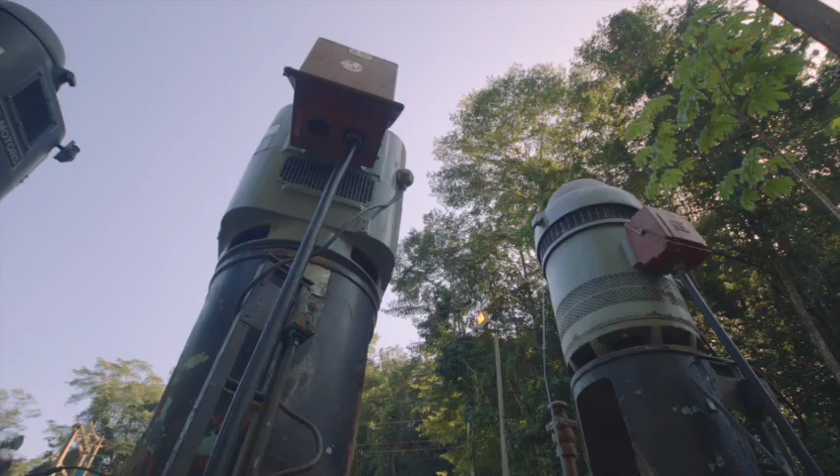Understanding the global importance of fresh water and its limited supply in today's world, where climate change is a real phenomenon, non-revenue water management is the first step the authority is taking to optimize the water being produced by the North Oropouche Water Treatment Plant as it attempts to meet the existing and growing demand for its customers.

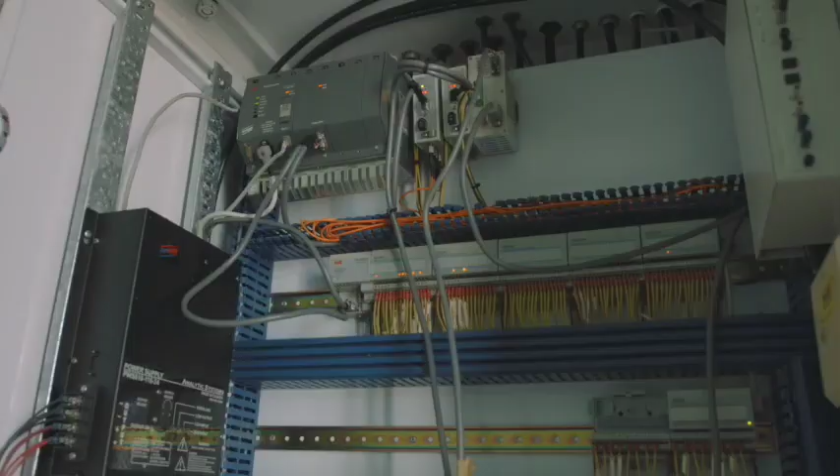To this end, the first smart water network in Trinidad and Tobago is being established on the North Oropouche Water Supply Zone by a team of dedicated persons from the Water and Sewerage Authority. The team aims to automate and digitize the production and distribution of this system.

North Oropouche, which is our second largest water production facility, though producing that volume of water, the water was not actually reaching the areas on its extremities. So for example, Five Rivers, Coal Mines, Coryal, Manzanilla. So in our attempt to better serve the population, we put together a small team of engineers and other special purpose practitioners to develop and assess the network towards producing a better supply to the community.

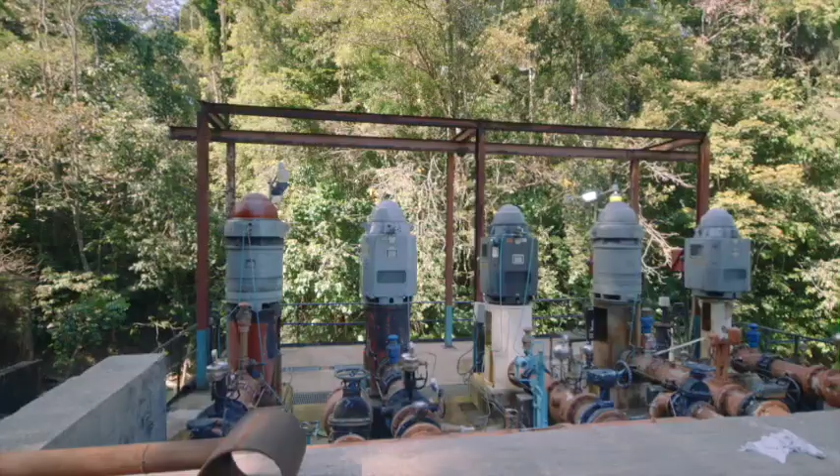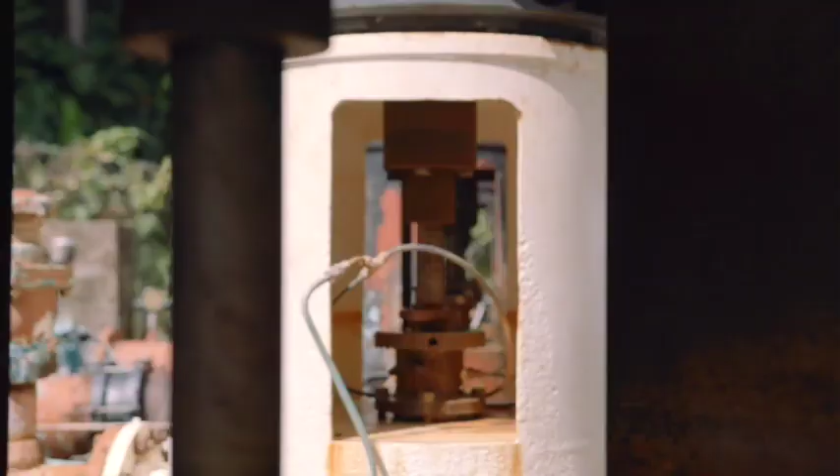The North Oropouche plant was built and commissioned in the early 1980s, and at present the current capacity at the plant is 20 million gallons per day. There are limitations on the production at the facility which varies in extreme dry conditions as well as when there's extreme rainy weather conditions. The potable water being produced by the North Oropouche Water Treatment Facility would exit the facility or be discharged by the facility via a 42-inch pipeline.

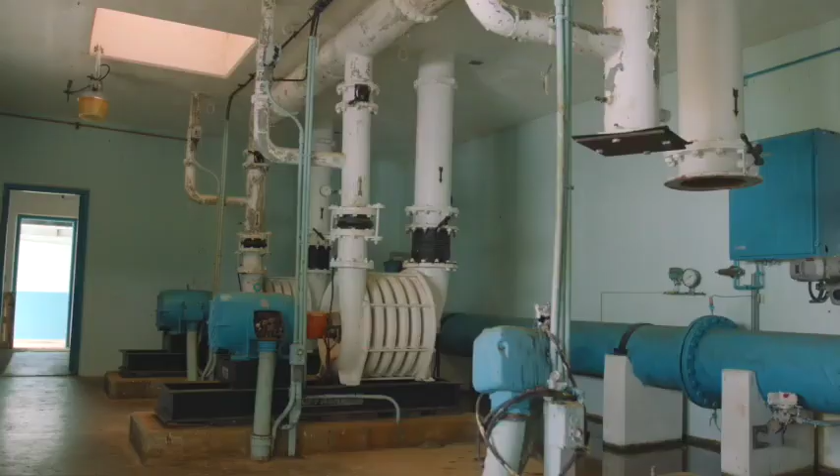This pipeline has approximately 13 or 14 offtakes, and there's no actual management of this water through the offtakes. So basically we have a first come, first serve. The offtakes closest to the plant would receive the highest pressures, the highest volumes, despite their actual need. We noted that proper management of the potable water along the distribution network had to be implemented.

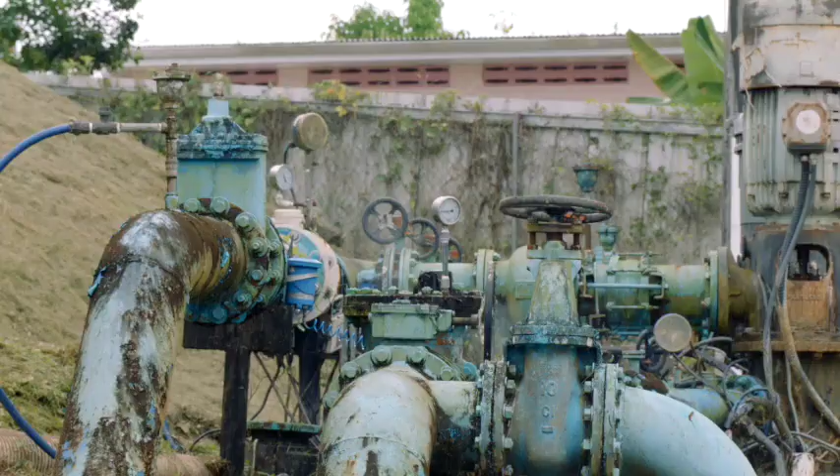After this upgrade, the plant will be continuing to produce 20 million gallons, but instead using 4 water pumps. We will now have that extra space, one pump, to become a standby so that in the event we have failure, we can easily switch over.

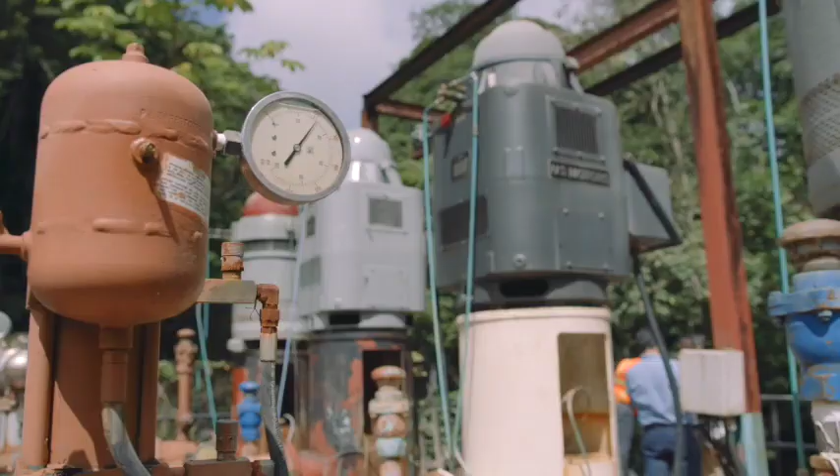So what has been done differently with the North Oropouche Supply Zone is an end-to-end approach in terms of the automation. No longer are we just looking at automating individual facilities and boosters. We're also looking at automating the valves of the offtakes, which allow now pressure management to be done from the input at an offtake throughout the critical points located at what one would call the worst case hydraulic nodes within the distribution system. Nodes that actually allow the authority to estimate how well customers are being serviced within that particular distribution or pressure management zone.

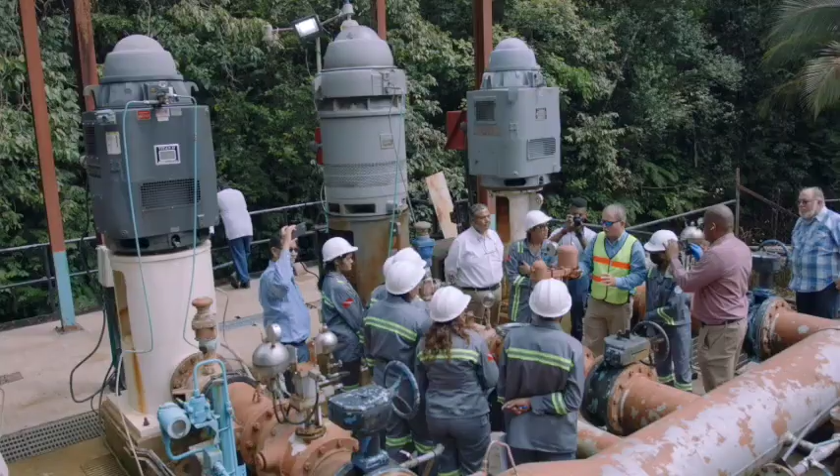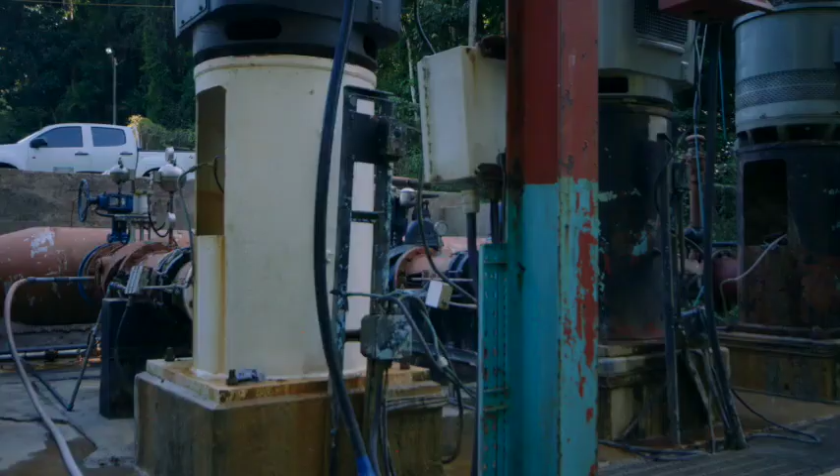The assessment started with gathering data because we intended to solve the issues from a very data-driven standpoint. So we gathered data from an infrastructural standpoint, that is the civil, mechanical, electrical components as well as the automation component. So we would have assessed the efficiency of all of the pumps on the plant itself as well as the associated booster stations, the electrical as well as the mechanical. We also looked at the civil aspect of the raw water intake and the plant itself for their level of efficiency.

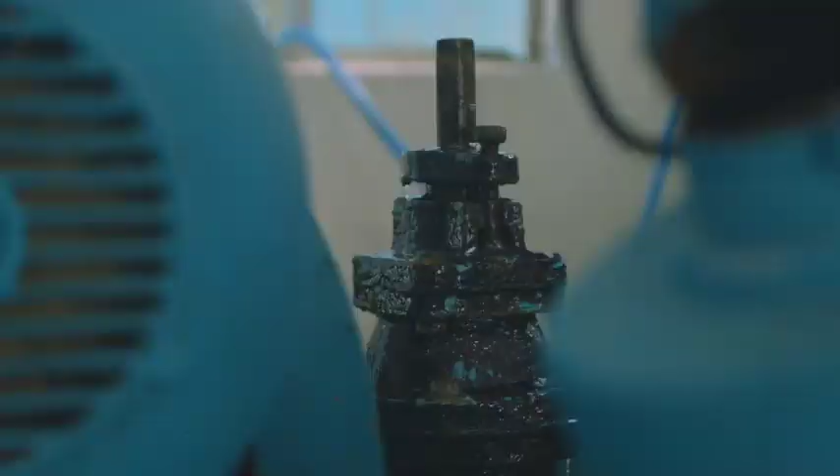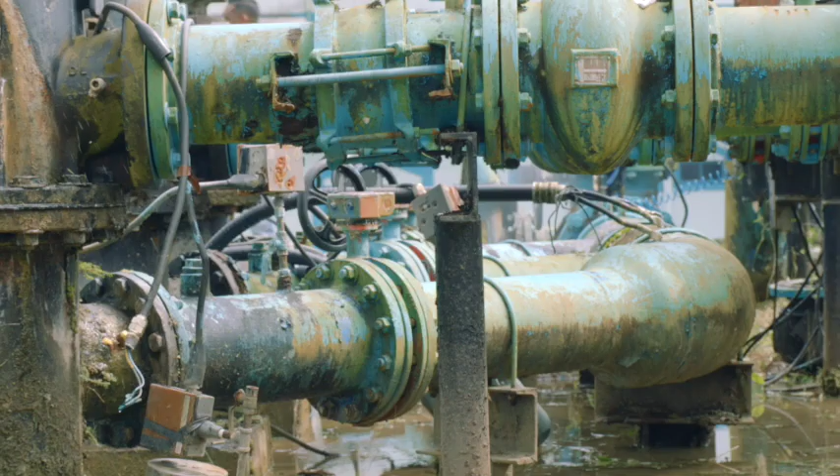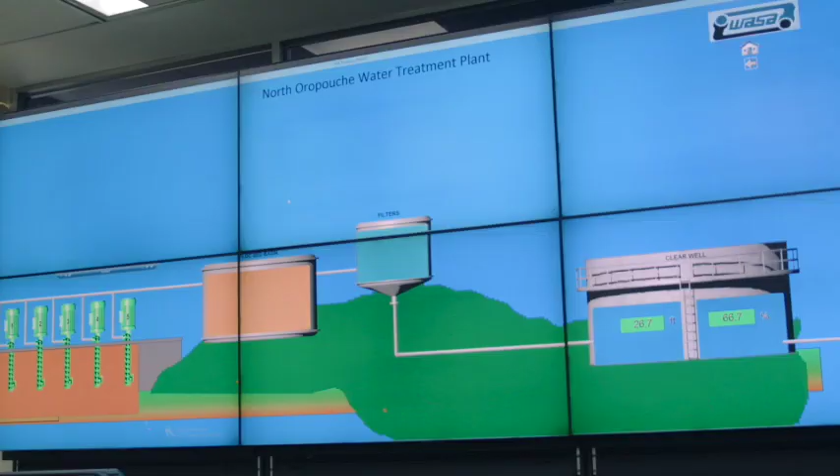The concept of creating a smart water network is to improve the ultimate service to customers, improve their service and reliability. And this will be done through the installation and implementation of not only flow meters but also pressure loggers on each of the offtakes. We intend to also install smart PRVs which regulate both the pressure and the volume of water as needed through each of the offtakes. Automation, therefore, is the foundation on which a smart water network is built. It's not the only component, but it is the foundational requirement to have a smart water network.

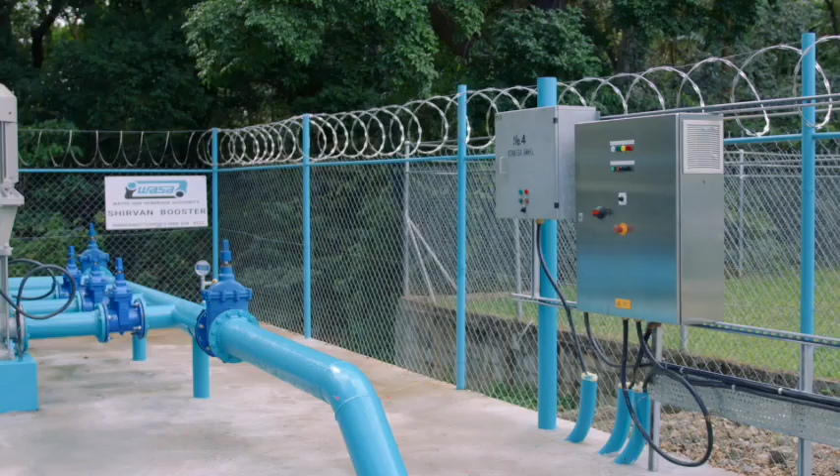So typically SCADA would look at facilities, but as we talk smart water network, and the operative word being network, it speaks to a wider penetration, the creation of a digital nervous system throughout our network. And mass distributional sensors will play an integral role in establishing this, and the first would have been the data logger. So the data logger basically is a simple device that measures either pressure or flow. It could do other parameters, but that typically is the 2 parameters that we use it to measure. And it will measure this in real time and transmit it telemetrically back to our central data store.

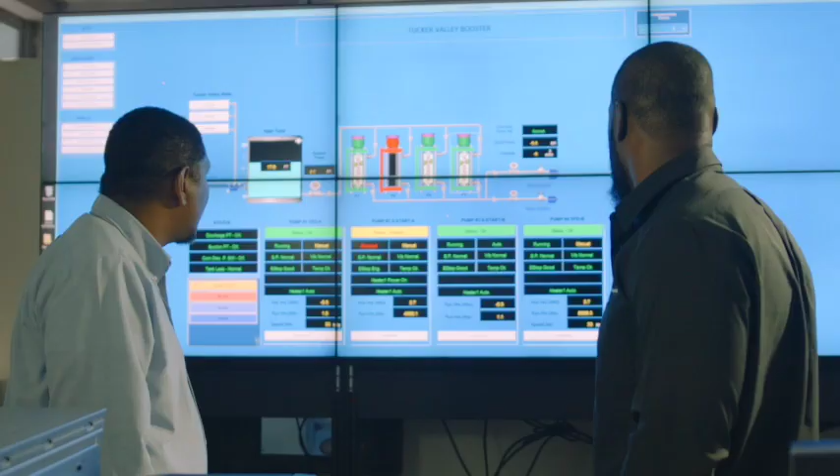The control system therefore has access to that information, and based on how it is programmed or algorithms that exist in terms of best practice for service deliveries, decisions can now be made on what sort of pressures are required to give customers a better supply.

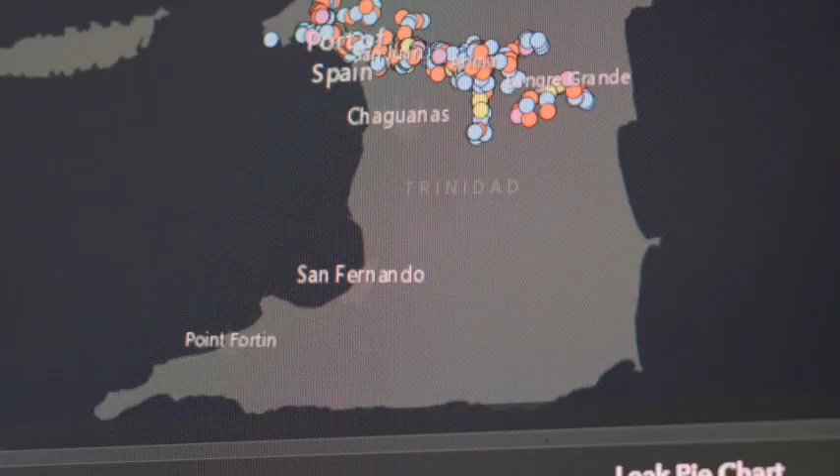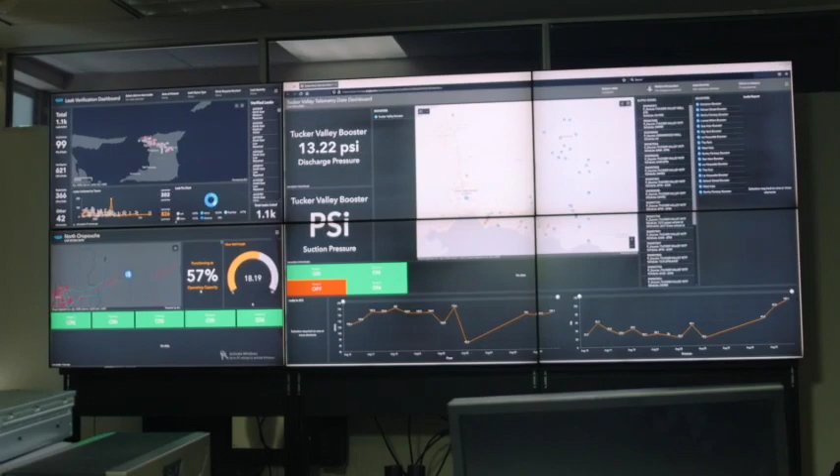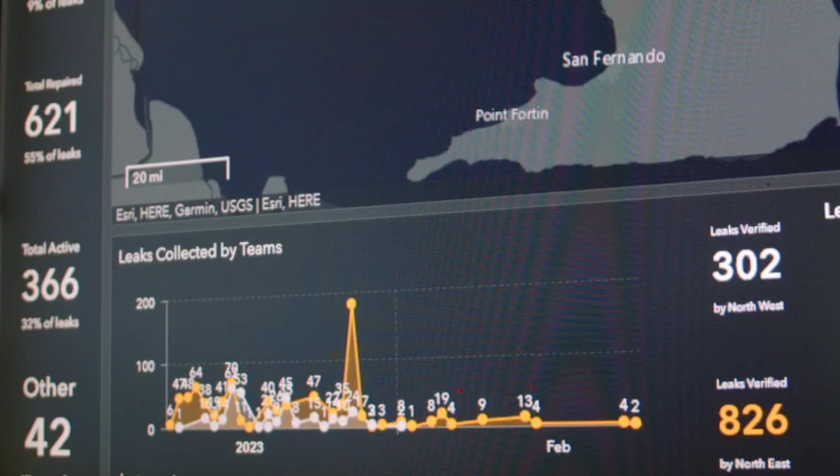The gathering and capturing of telemetry data across the country is just half the process of actually utilizing the data. The other half would be displaying and visualizing the network across geographic planes. The multiple ways in which data is going to be presented will be done using the ArcGIS environment across the authority. Dashboards will be generated to allow managers and decision makers real-time information so that they can make more educated and informed decisions. With the data being captured, we'll be actually able to draw a real picture as to what is going on at the plants.

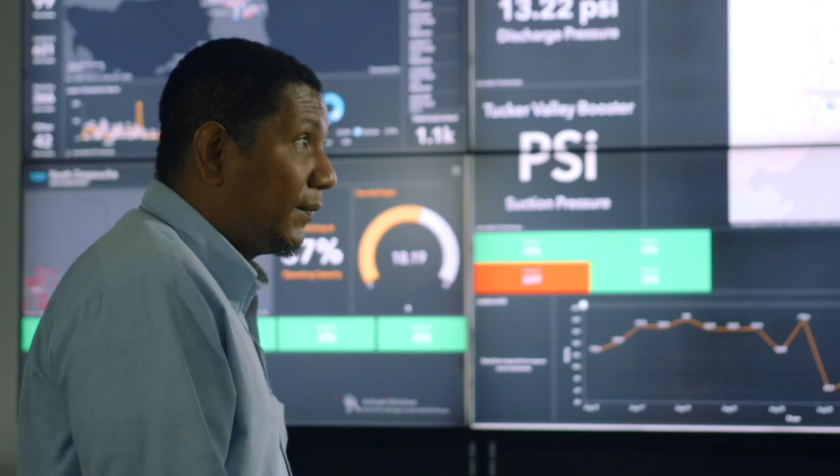With this data, we'll be able to see where pressures drop off or flows increase, which will allow us to alert managers in regards to issues that need to be addressed. That data would allow better decisions to be made as to what is required to actually transition customers to a 24/7 supply.

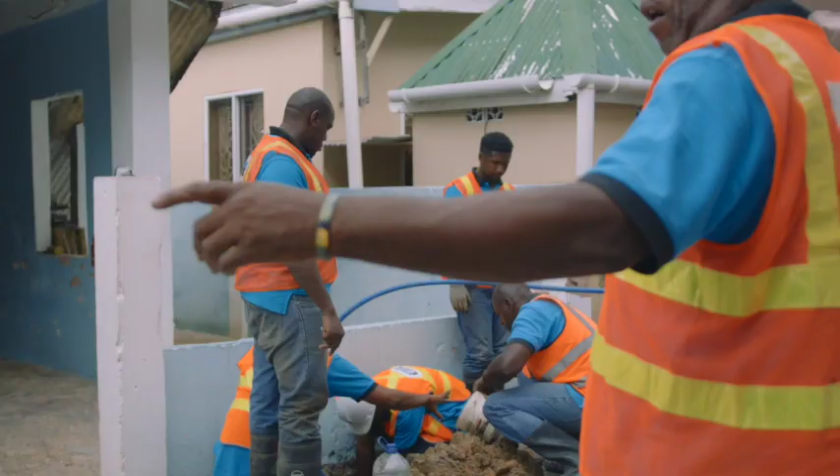With the establishment of our Operation Control Center, we'll have 24-hour monitoring taking place. With this real-time data, we'll actually be able to perform the duties of responding to customer issues regarding no water, low pressures, faster at a real-time pace. Visually understanding what is going on at our facilities, being able to quickly identify leaks, quickly identify anomalies on our system and address them on a 24-hour basis.

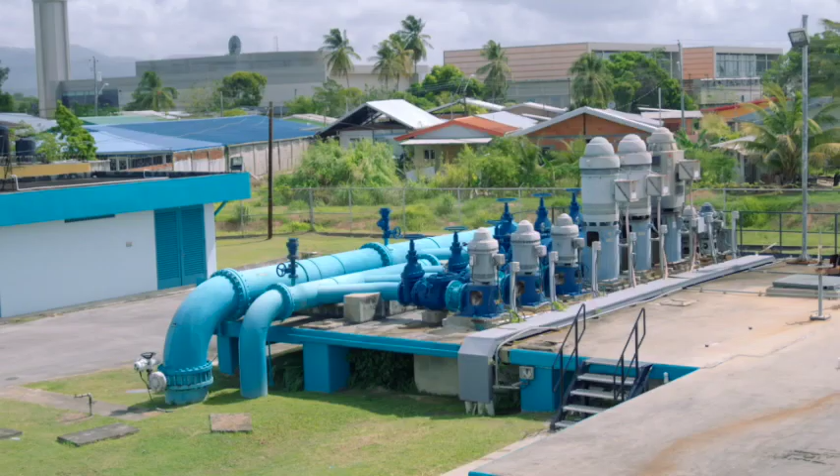So together with the increase in the infrastructural work or the refurbishment of the various plants and facilities, we also intend to increase the level of automation both at the plant as well as along the distribution, transmission, trunk main. We would move therefore from the source of our product, which would be the water treatment plants. We'll look at the transmission and distribution systems, and of course the facilities along the way such as boosters and wells, and we'll also look at valves and how we route water to customers.

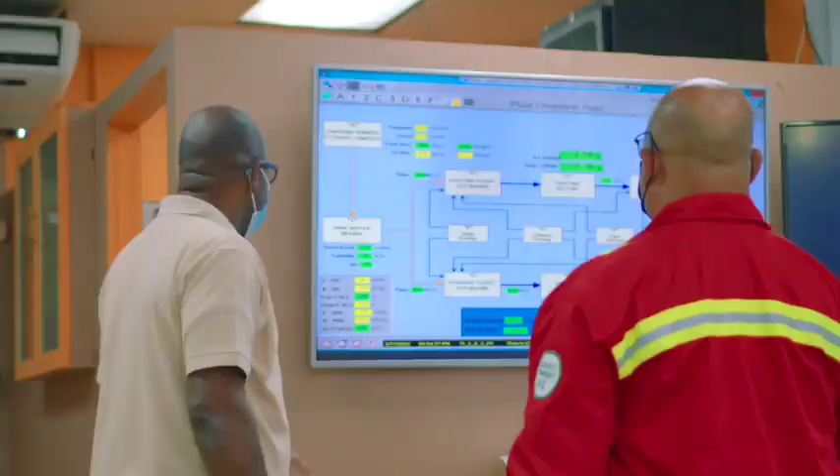That allows us to do pressure management. And pressure management and the control and delivery of not just water, but the service factor, which has to do with the pressures that they deliver at and the schedules being met. That ability to optimize that delivery with those parameters is what comprises a smart water network.

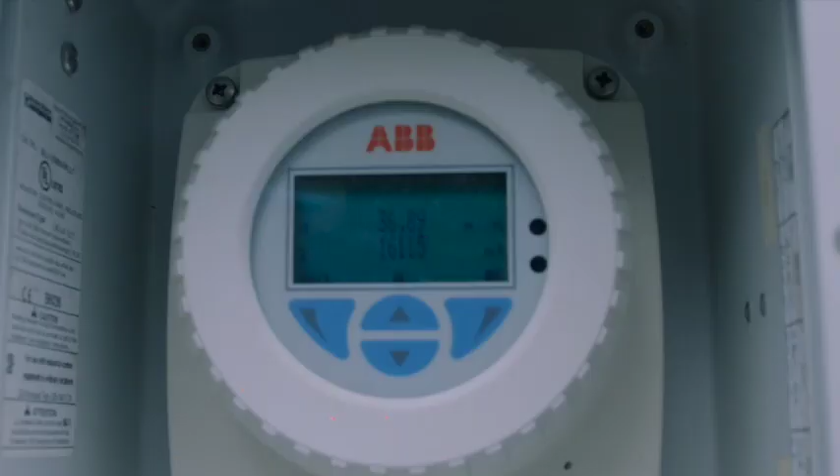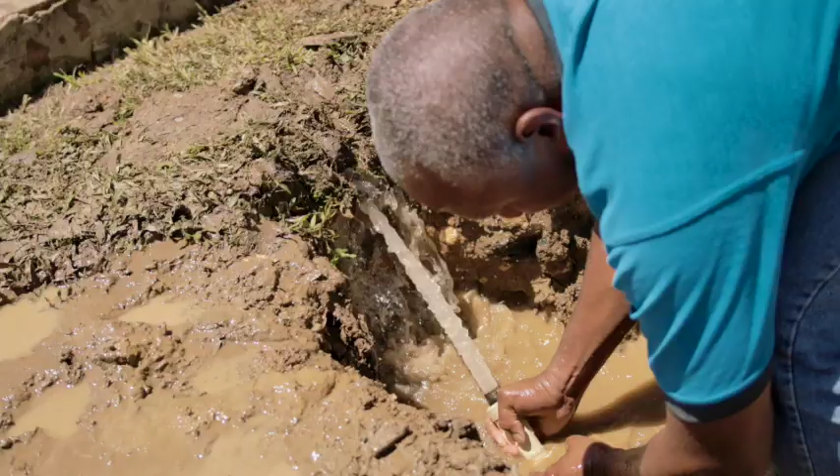With the capture of data, we will not only have data for one specific plant, but nationwide, both Trinidad and Tobago, allowing us to constantly monitor in real time all our plants and all our facilities. We'll be able to actually accomplish real-time job management of our employees. So, for example, reports in regards to leaks, in regards to no service, all these things will be actually populated on our dashboard immediately from our employees, so we know areas that we have to investigate.

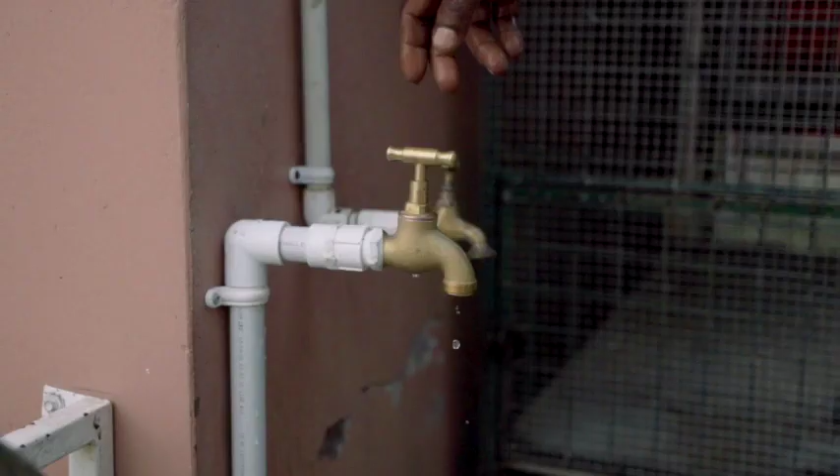Just the ability to be able to have pressure management being performed. The first benefit would be that the available water would now be directed to those who need it most. And we will no longer have the case of high pressures going to areas that don't need it and other areas along the system suffering from low pressures. Basically, with demand studies and pressure management, customers will get exactly the service that they are able to get based on the available supply. And definitely we should see more equitable sharing of the existing production capacity.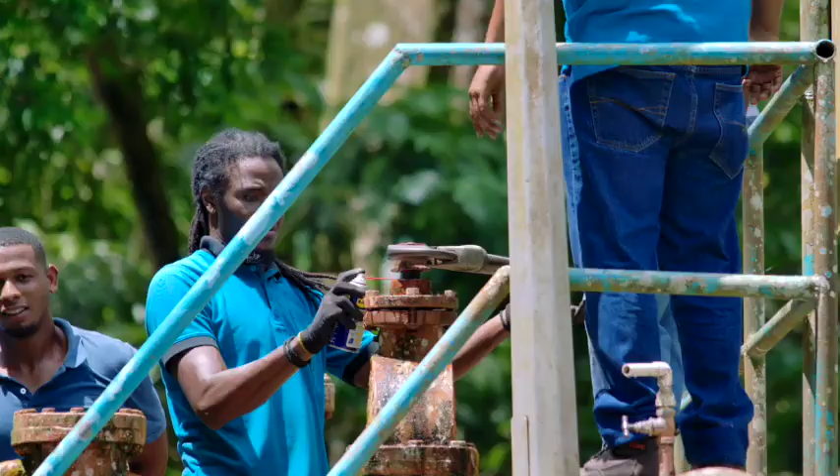The Tucker Valley Supply Zone, also earmarked for automation, is unique in that the raw water supply and production capacity of the Tucker Valley Treatment Facility exceeds the collective demand of domestic and non-domestic customers. This means that with the implementation of non-revenue water management principles, continued operational good practices, and robust preventative maintenance, the entire zone has not only the potential to supply its customers with water 24 hours a day, 7 days a week, but it can also actually export some of this water to neighboring zones to supplement their existing supply.

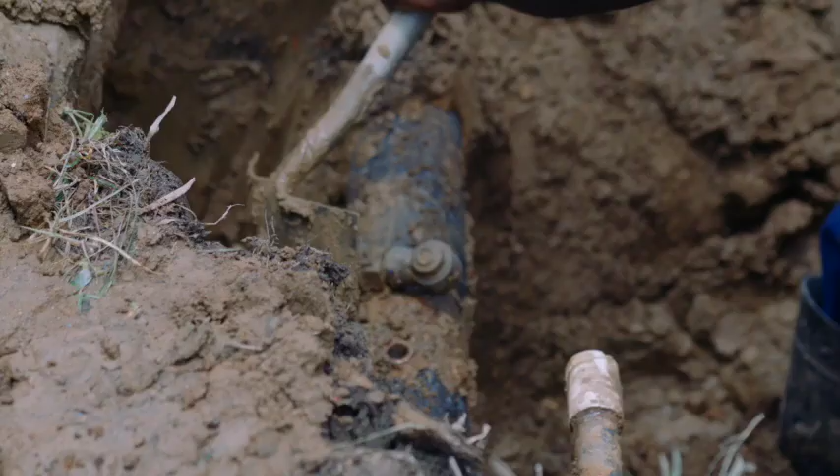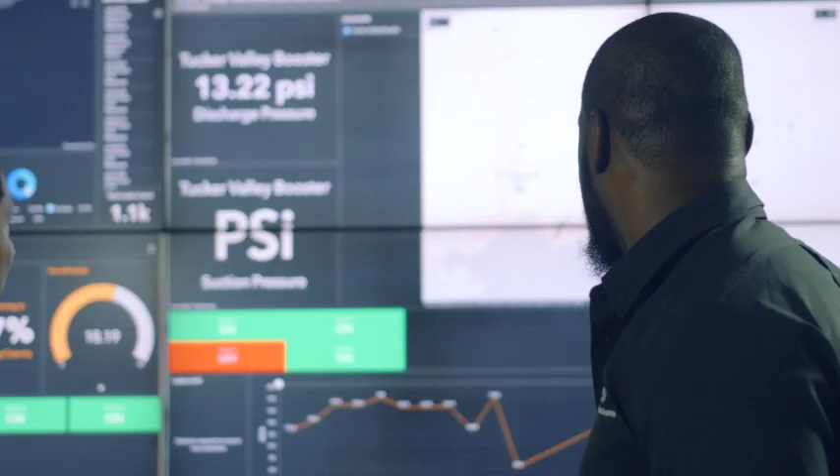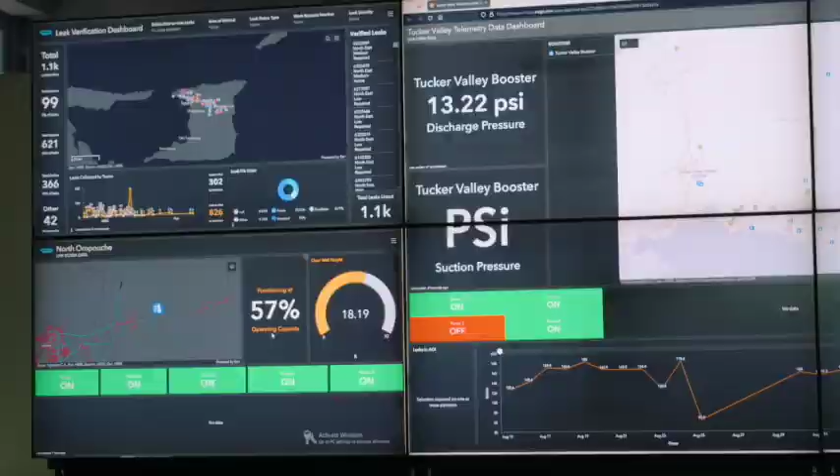This outcome of supplying a 24/7 level of service will be achieved by aggressively repairing all leaks within the zone, implementing pressure management principles, optimizing the distribution of water within the zone, and increasing the ability to monitor and control the operations through full automation. The leak management process, which is something that we'll be working on, is actually going to allow us to not only know where a leak is, but do things like spatial analysis to identify where we have weak points in mains, along a main line, or even in areas that need to actually be paid attention to.

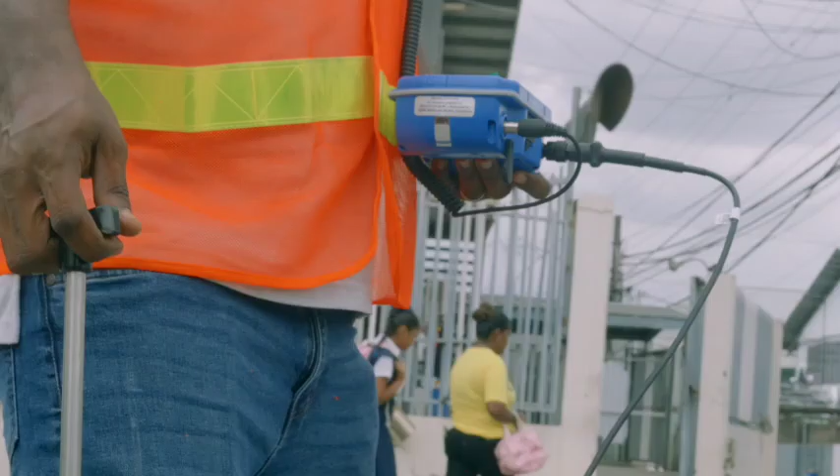SCADA itself is supervisory control and data acquisition. It really describes the components of hardware and software that work together to allow remote control and automation of facilities related to water treatment, production, distribution, and monitoring and control. Without SCADA, we wouldn't be able to manage facilities as distributed as we have presently.

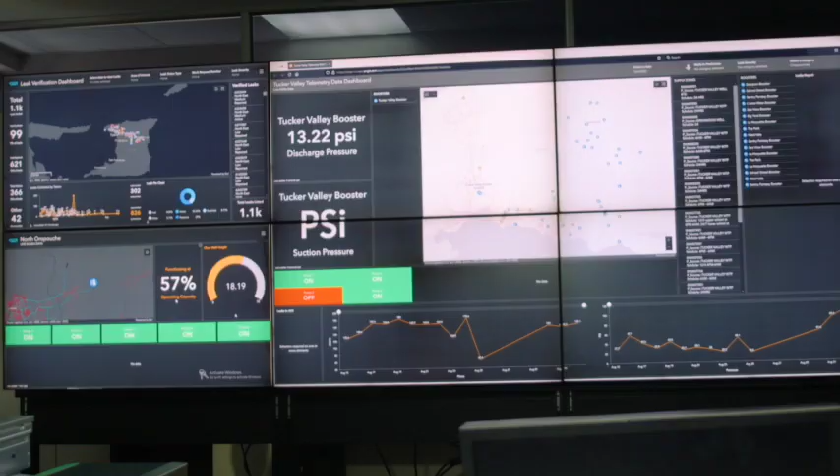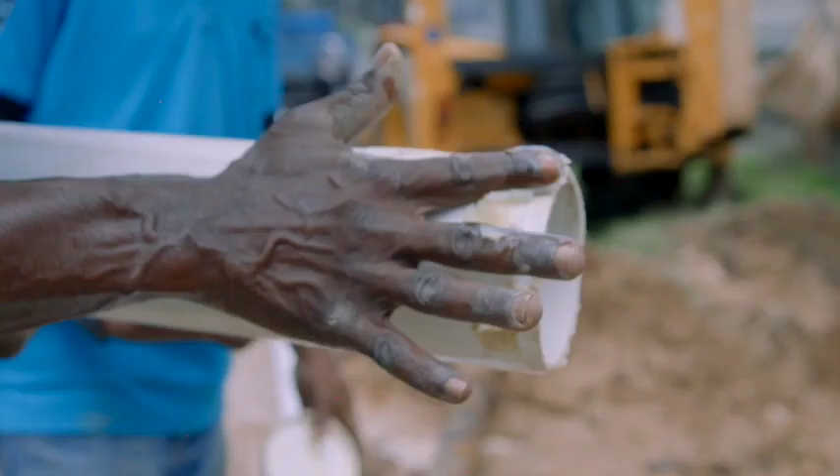The advantage of a GIS dashboard is that we'll no longer need the input of a customer to know when we have a problem. With the drop in pressures being shown and being alerted immediately, we would then know that more than likely there's a break on a line, so we can have these repairs done speedily and effectively so that the customer experiences the lowest latency possible in regards to getting a service re-established.

The added benefits in expanding SCADA throughout the country would be to be able to get efficiencies of scale, to be able to have staff work more smartly, to be able to know precisely where inputs to the organization go, how they're used, and how their resources could be maximized in terms of achieving customer satisfaction.

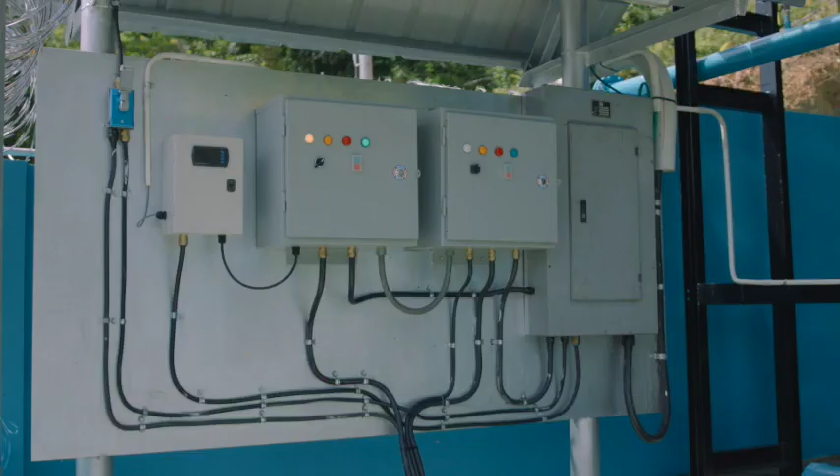Once we improve the actual management of the water that is being distributed along the transmission main, each area or each community being served by this water treatment plant will in fact receive the needed pressures and volumes based on the demand. That is the population, the various types of industry, be it commerce, be it agricultural, etc. It will no longer be a first-come, first-served basis. It will be what you need as you need it. And that means we will have the water and the pressures at the extremities. So Five Rivers will no longer have a problem. Coal Mine, North Manzanilla.

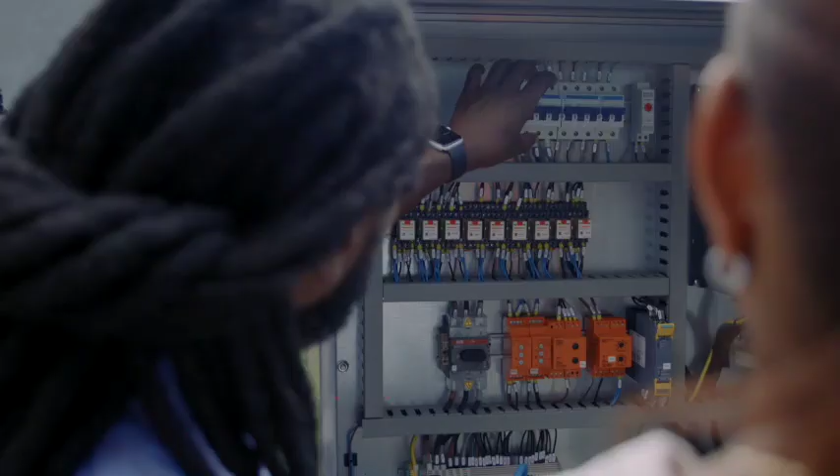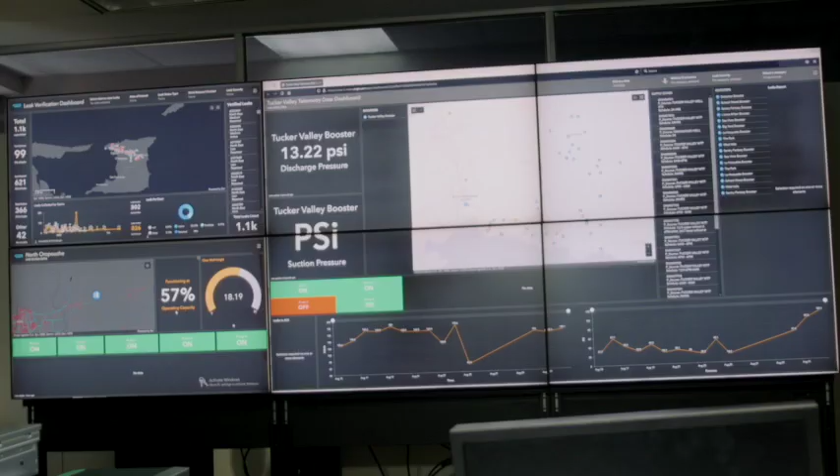We are here at WASA to improve our service to our customers. And we are doing this through the implementation, the establishment of a smart water network. WASA, a smart authority. Trinidad and Tobago, get excited as we expand this digital transformation to your community. Soon, inconsistent water supply will be a thing of the past. Real-time monitoring of our system 24 hours a day will greatly improve our response time and service to you, our valued customers. WASA, being digitally transformed into a smart utility.